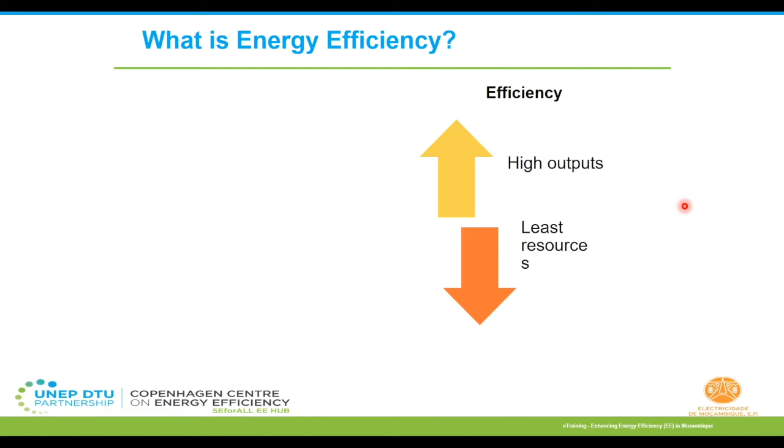Resources like time, money, raw materials, and in fact, your personal energy are required to achieve a level of output. These resources are quite limited, and everyone at every level constantly seeks ways to be more efficient. For example, a company would train their salesmen or deliver better product presentations to make sure that they have a better market penetration. Industrial plants may increase their product output by upgrading their technology and other process operations.

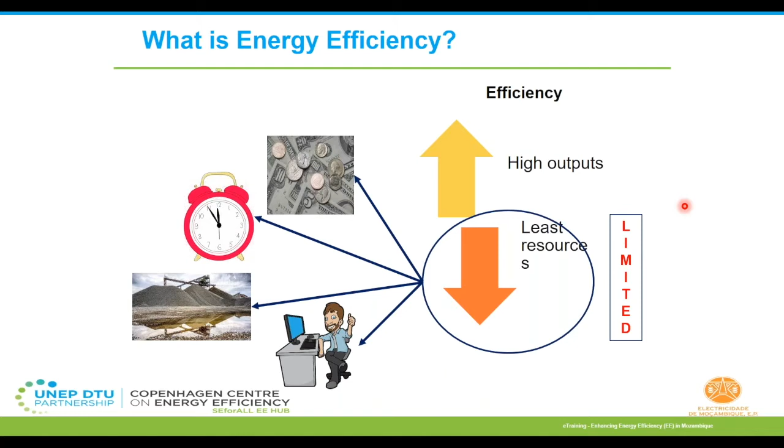So there are several representations defining the term energy efficiency. However, all refer to the same meaning. I am presenting here a broad definition used by the European Union Energy Efficiency Directive. It says energy efficiency means the ratio of output of performance, service, goods, or energy to input of energy. And it is usually represented in percentage values, 0% to 100%.

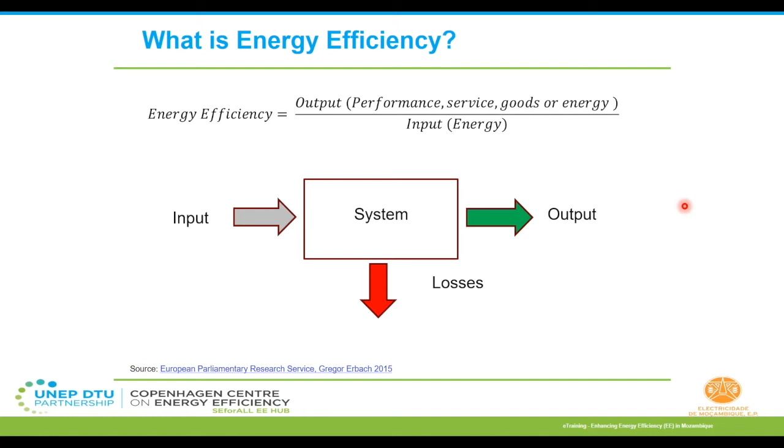To understand this better, consider a system. This system is something you define. You can consider your system to be a component such as an electric motor. It can be a boiler, it can be an entire building or a manufacturing industrial plant. There is input and then there is output. Usually the entire energy input is not completely utilized and there are losses that are bound to happen due to various reasons. We often talk about improving energy efficiency. So looking at the simple mathematical equation and the representation of a diagram here, we can easily infer how energy efficiency can be improved.

Option 1, you may adopt certain advanced technologies which consume less energy input for the same output that you are producing. Mostly energy labeling standards are based on this, wherein you find a higher rating for a given output. Let's say for air conditioning units, for a given cooling load output that it delivers, you have different energy labeling ratings because of different energy consumption patterns.

Option 2, you may adopt some operational changes to enhance your output production for the same input energy consumption. And then, of course, the most sought-after option is option 3, where we target at the first instance to minimize the losses in order to improve our efficiencies.

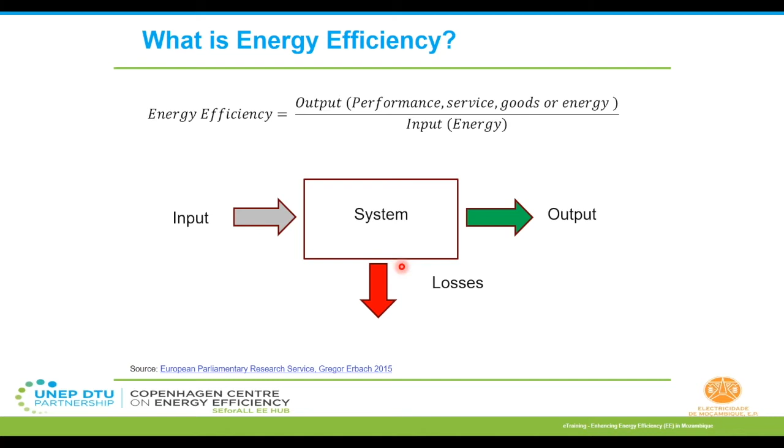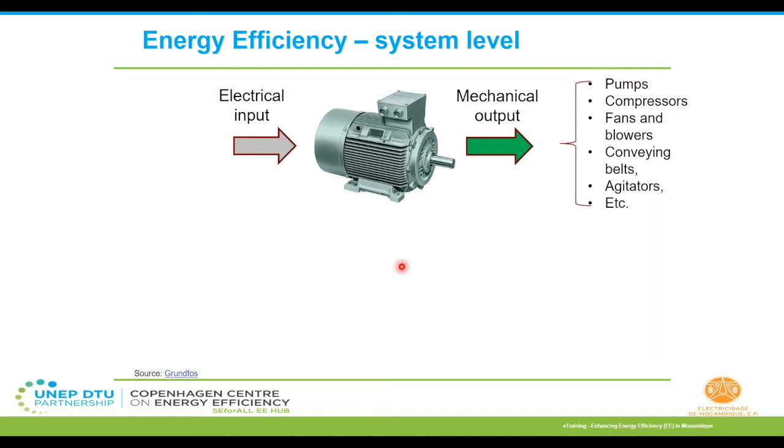Let's take an example of an electric motor. The input is electrical energy and the output is mechanical energy used for various applications. You must have seen on the design nameplates of motors the motor's design efficiency. For example, here a 5.5 kilowatt motor indicates an efficiency at full load of about 85.7%. That means for every 100 units of electrical energy that I use as an input, it gives me around 85.7 units of energy as a mechanical output. And of course, the remaining 14.3 units are generally lost in terms of various losses.

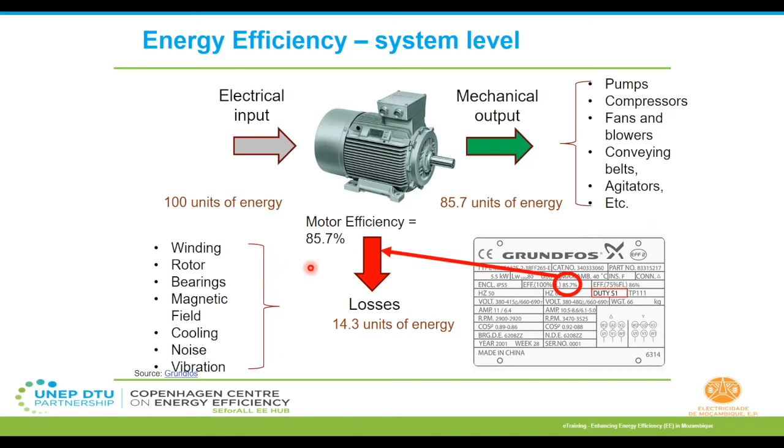Let's take another example of a boiler. The input is heat energy. It can be from coal, diesel, or gas. The output is also heat energy, which can be steam or hot water, later used for different applications. If you have come across any design details or performance reports mentioning that the boiler efficiency is say 90%, that means for every 100 kilocalories or every 100 units of energy that you use as an input, you get about 90 units of energy as an output, and the remaining 10 units are usually losses in different forms.

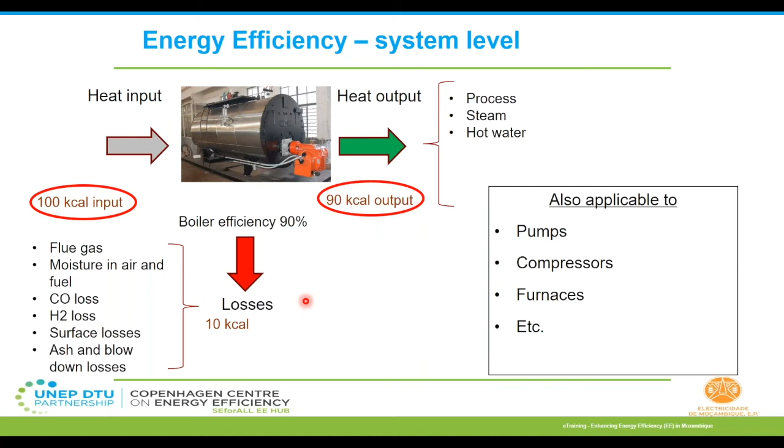This may vary. Something similar is applicable for pumps, compressors, furnaces, and other systems also, the same approach. Now, you have noticed here the units, generally they are the same units, often for several other scenarios. The representation of energy efficiency may not always be a unitless value, shown only in percentage. We will see some differences in the next slide.

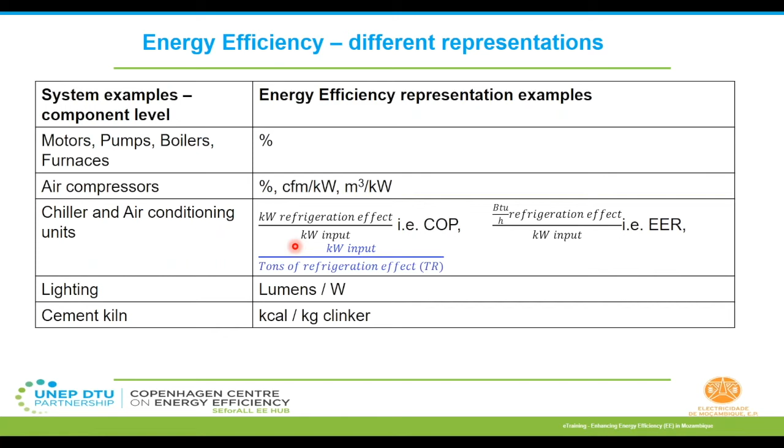Hope you are all still with me. Hope this is not confusing. I will show you more examples. Next slide.

As I mentioned in the last slide, for many manufacturing processes and other energy dependent activities, comparing input and output in the same units to derive a dimensionless number is not a practical approach. If you remember from the initial slides, the energy output can be energy, even goods, products, services. Please note that the ones presented here are actually inverse of efficiencies, for a practical approach, the standards we generally use in day-to-day presentations.

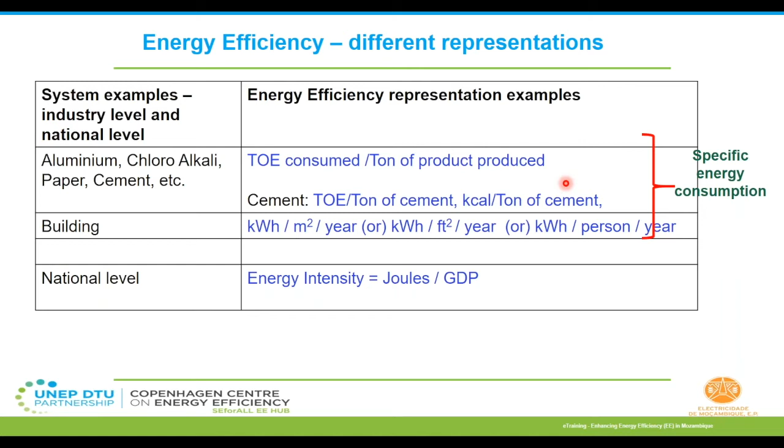Such indicators are often called specific energy consumptions and are widely used to compare energy efficiency across plants, across buildings, and even transport vehicles. On a national level, the term energy efficiency is not often used. We use what we call energy intensity. I think yesterday my colleague Gabriela also touched upon this part.

Unfortunately, in this process of increasing our energy consumption for the sake of development, we tend to forget about the negative impacts of this increased energy use. Negative impacts can be at global and local level, such as climate change, local environmental degradation, resource depletion such as water scarcity.

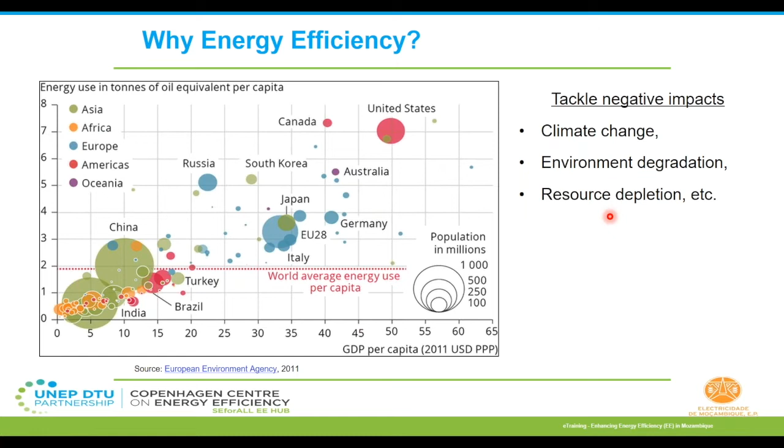At an individual industry, building, or service level, being efficient will help in reducing operating costs and enhance profitability. By being efficient, companies can gain competitive advantage over less efficient companies. That means increased profits, lower product or service prices, resulting in gain in market share. At a national level, the possible result would be reducing your energy imports. Imagine countries spending billions of dollars importing fuel and constantly under the pressure of foreign exchange. Energy efficiency would move them closer towards a more self-sustainable economy.

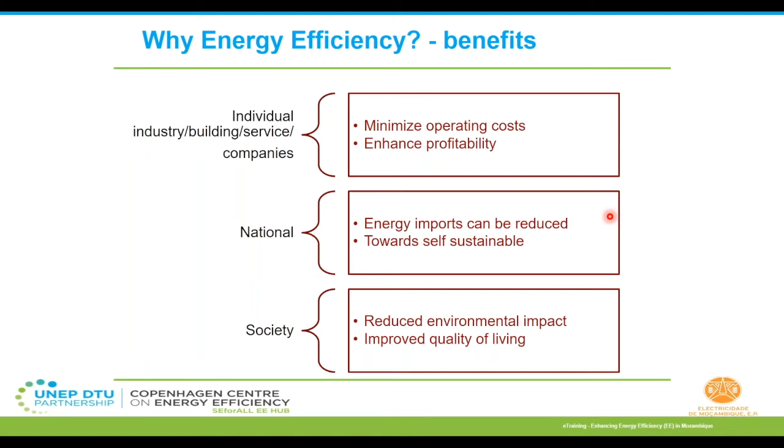At society level, it would improve the quality of living. Extensive fuel is being consumed in various uses, resulting in air pollution and other environmental impacts. In a way, energy efficiency would help mitigate all these problems. So these are some of the examples where countries and municipalities at different levels have incorporated energy efficiency measures into their mainstream policy and implementation areas, and they have phenomenally reaped the benefits in terms of energy savings and economic development.

Of course, this is one of the projects which I have also worked on personally. It's called the Perform Achieve Trade Mechanism in India, by the Bureau of Energy Efficiency and Ministry of Power. This is for the cycle of 2012 to 2015, where industries or other high energy consuming entities like buildings and hotels were given targets to achieve a certain level of efficiency. Within 2012 to 2015, they were able to save about 8.67 million tons of oil equivalent. Since this is mandatory, whoever is selected for compliance is supposed to reduce their energy consumption, and each is given targets.

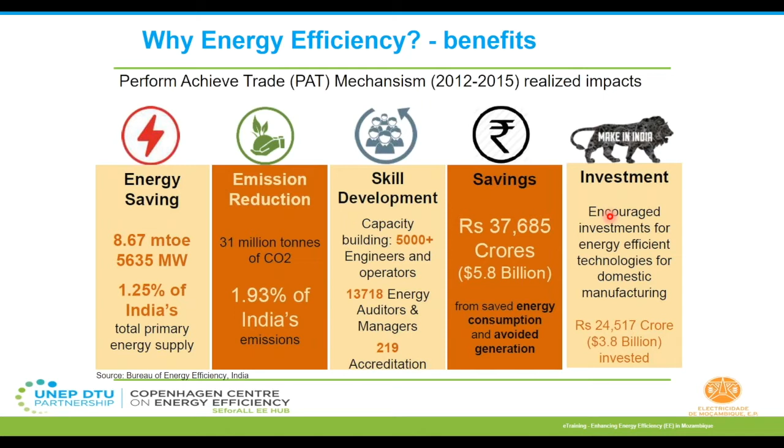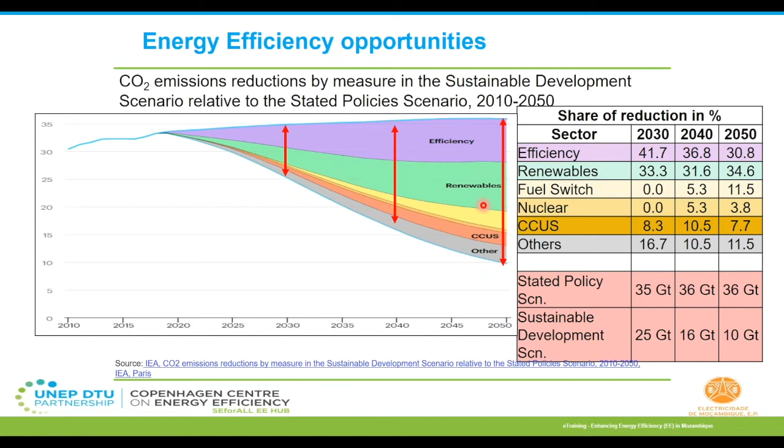Having seen that there will be opportunities for energy efficiency to play a vital role in sustainable development and limiting climate change, what are the other motivating aspects? Well, to start out, of about 192 countries who participated in the NDCs, 53 countries, that is about 27.6% of them, do intend to engage themselves in building energy efficiency as one of the aspects in achieving their targets. This is only building energy efficiency. If you consider energy efficiency as a whole, then you will have a lot more countries which actually set targets and aim to achieve them.

With new technologies constantly moving up into the market, they also set up new benchmarking levels. So yes, there'll always be scope for improvement with the help of energy efficiency. And at last, if businesses have to survive in the market, they have to take advantage of improving efficiencies and cutting down losses in various forms.

Energy efficiency integration with energy access. Well, often most of us, being privileged enough to avail a decent quality of life, continue to use and at times even abuse energy. When we talk about energy efficiency, the highlights are often how much energy we save, how much cost benefits a firm or an individual, and of course, in the process, how much the economy of the country is changing. What many forget is how our efforts in enhancing energy efficiency can literally bring light into the life of several energy starved regions.

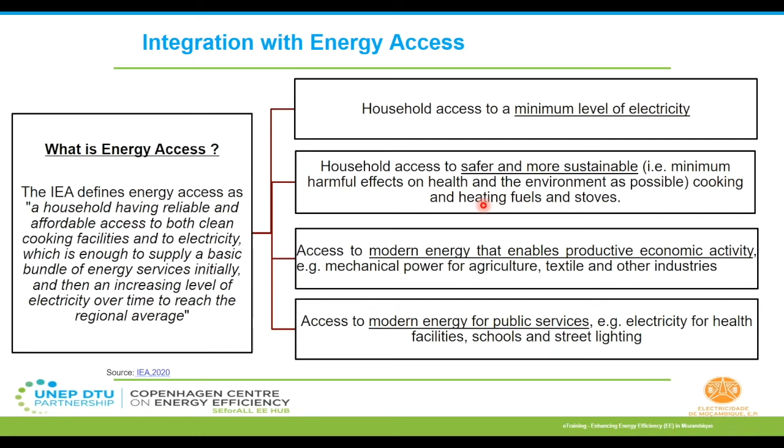The key points we need to focus on here are access to a minimum level of electricity, access to safer and more sustainable sources of energy, access to more modern energy which enables productive economic activity, and of course modern energy for public services.

We will quickly see how electricity reaches your homes, offices, and factories. Most of the participants, particularly from EDM, I believe, must be aware of this. This is for the benefit of those who are not aware of the details here. This and the following slide should give us a sense of how every unit of electricity that we save at the user end means a lot.

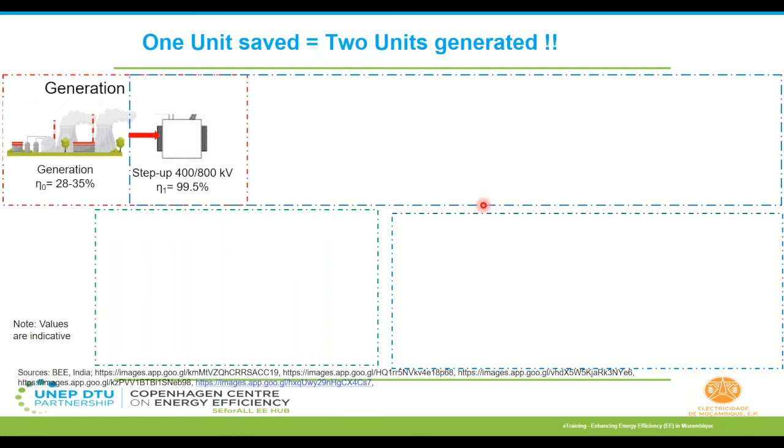So we have generation, that is thermal power plants. They are generally about 28 to 35% efficient, depending on the size, the age, the capacity utilization, and the type also. So when the electricity is generated from the power plant, it is sent to step up. The voltage is stepped up so that it complies with the requirements of the EHV transmission and substation lines, the extra high voltage lines.

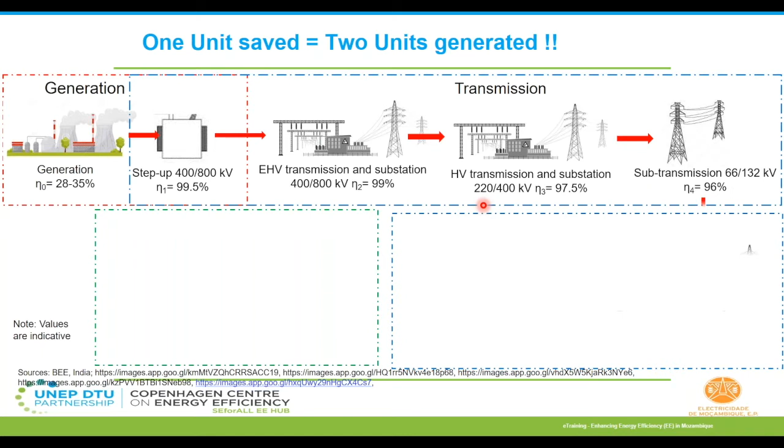And then from there, the electricity journey travels through high voltage transmission and substation lines, further transmitting and finally entering into the distribution network, where it is stepped down. The voltage is stepped down to cater to the needs of the end user requirements.

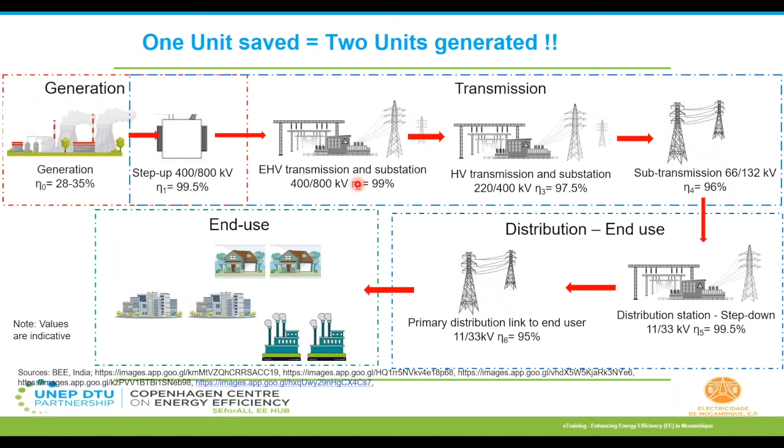So if you see, each section or each system individually has their own efficiency values. That means there are certain losses that are bound to happen during transmission and distribution networks. Please remember that the values are indicative. Depending on the type of utility or depending on the countries and the infrastructure, the values can vary.

So to be brief here, you have a generation system, where electricity is generated and pumped in at point A, and you have the entire transmission and distribution network, where usually the losses are somewhere around 17 to 50%. That means 50 to 83% efficient. And then the electricity finally, for example, here I'm taking an industrial plant context, enters into the plant's distribution network. It's again about 95% efficient.

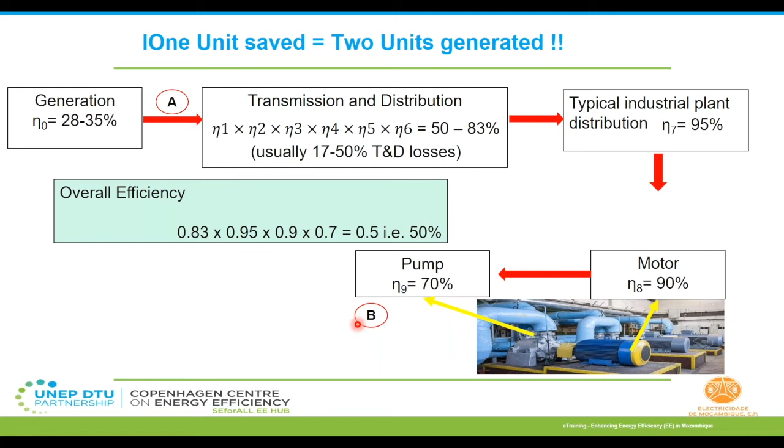And I'm calling an end user here to be a pump and a motor. So the electricity is fed into the motor, which is about 90% efficient, and then finally used for a pump with a 70% efficiency at point B, where you actually use the energy that is being supplied. So overall efficiency from point A to point B, it's called a cascading effect. If you multiply all these things cumulatively, the overall efficiency is about 50% only.

That means for every 100 units that I supply into the grid, finally I will be able to use only 50 units worth of energy that is being pumped. So that means if I save 1 unit here, it would be equivalent of generating 2 units here. So now I think it should be clear the impact that one would be creating sitting at home or office or even at an industrial plant. If you save 1 unit, how many units you are actually saving, and what is the larger impact it would have?

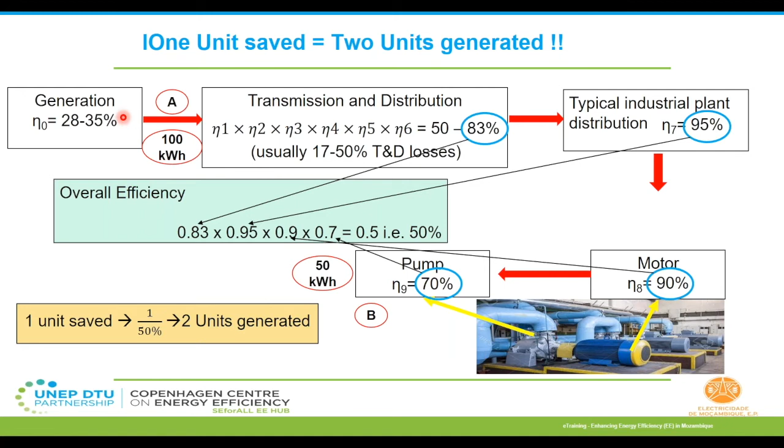Positive impact. So what are the benefits of energy efficiency in energy access? Well, if throughout the entire system, the T&D system, the user distribution system, as well as the end-use areas, you are efficient, you would avoid unwanted investments for new power plants because there is reduced demand, and due to reduced demand, the pressure on transmission and distribution lines is also reduced. And the energy that is saved in one location can thus be utilized for other energy deprived locations.

I will move on to the next topic, the energy efficiency integration with renewable energy. So we all know, but a quick introduction on renewable energy. It is also referred to as clean energy, usually a natural source or process that constantly gets replenished. We tap into this natural form of energy through different means. You can use solar PV panels, where you tap into the sun's energy to generate electricity. Then you are aware of solar thermal, wind, biomass, hydro, and geothermal.

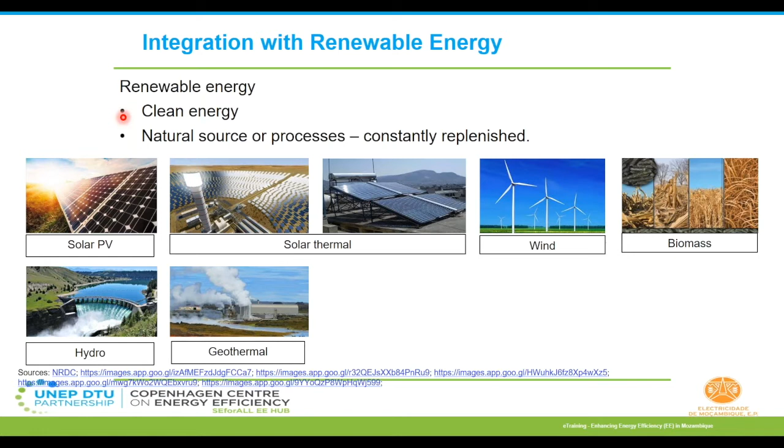So there was one question which was given in the polls, whether energy efficiency and renewable energy, according to you, are the same or different, and around 60% said same. Let me make some things clear here. Renewable energy is not exactly energy efficiency. However, they may support each other. So if you see energy efficiency, it's basically utilizing the existing energy, irrespective of whether it is renewable or not renewable.

So mostly about how much work you do in less energy with no loss in quality. Renewable energy, on the other hand, is a source of energy which is inexhaustible. So let's say, for example, I am using an incandescent bulb. I will be replacing it with an LED or a CFL, an efficient bulb. That is what an energy efficiency measure is about.

Whereas with renewable energy, it doesn't matter what you are using, an incandescent or efficient bulb. It will be supplied for both of them. So there is a slight difference here, but we will see how they support each other. So here, if you see, renewable energy supports energy efficiency.

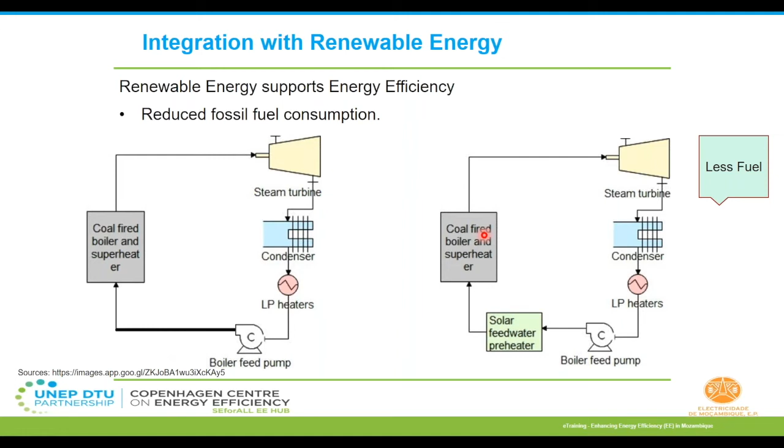For example, if the water is already preheated for the boiler here in a power plant, then you will have less fuel requirements to heat up the water to desired levels by the boiler. Similar applications can be used for hotels, kitchens, process industries.

We must have all seen buildings having solar water heaters on the rooftop. This is a way to avoid using electricity or gas heaters, a way of improving the building's energy performance index, that is kilowatt hour per year per meter square, because you will be relying less on external energy, that is gas or electricity.

I have personally seen many hotels and large kitchens segregating cooking needs and using steam generated from solar thermal, thereby saving large energy costs on cooking gas and electricity. So yes, if you integrate renewable energy and energy efficiency, the way renewable energy supports is through reduction in your fossil fuel consumption. Your costs come down, and your environment is much cleaner.

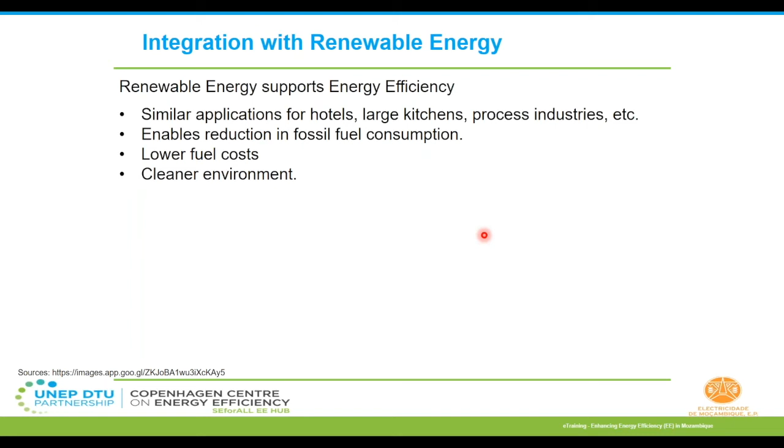Then this is another example where energy efficiency supports renewable energy. This is one of the projects I worked on earlier for a sector of college and school buildings. There is a college building which used to consume about 6,590 units of annual electricity. When it was only grid, let's say it's about 100%, then we installed a solar rooftop PV of

Then further, an energy audit was done, and recommended energy saving measures were implemented, mostly in the lighting, the kitchen cooking needs, and the computers, where the old CRT monitors were converted into new LED models. That way they were able to save about 5,000 units on an annual basis. Those additional units are further pumped back into the grid because they are not required, since the solar is already connected to the grid.

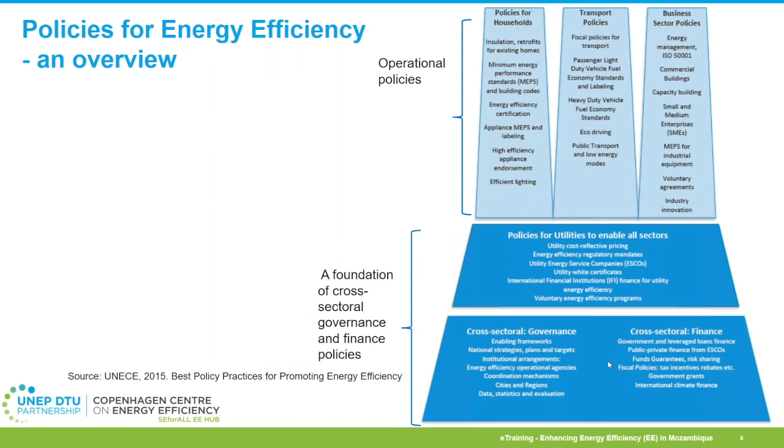And also the issue of finance, which covers all energy efficiency actions: how to make finance and funding available so that enterprises, households and public sectors take up energy efficiency in their investment, purchases and operations.

First, for households, especially homes, residential buildings and appliances. For homes, there's a lot of opportunity for insulation. There are many technologies available today, better, more effective windows, doors, insulation, to make homes more energy efficient so that you do not need so much energy for heating and cooling.

And things like shading, planting trees, how you do the roof, and also the direction of the houses, in the planning stage you can do a lot. And also minimum energy performance standards: in many countries there are energy efficiency standards, MEPS, especially for new buildings, or building codes, and also certification.

Like in Denmark, if you sell your home, you need to do an energy audit to show the energy efficiency level of your house before you can put it on the market. And also for household appliances, standards and labeling show the energy efficiency of refrigerators, washing machines, all the different household appliances.

Consumers and buyers can buy more energy efficient products. There's endorsement, like the Energy Star system, which endorses the most efficient appliances on the market, so if you buy appliances with the Energy Star label, you make sure you have the most energy efficient ones, and you also save money from that.

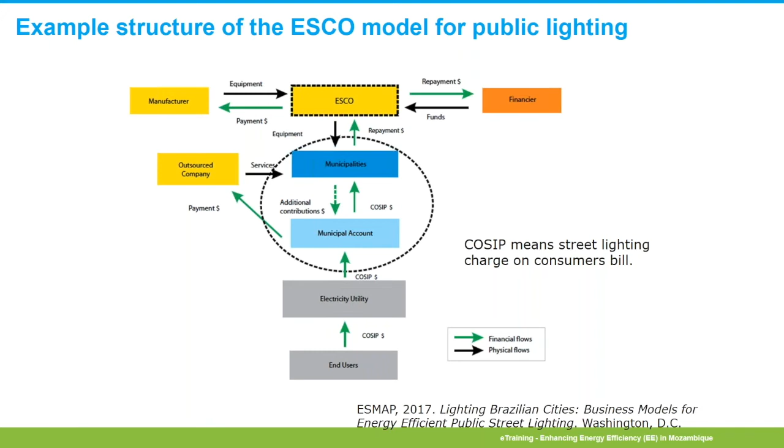Also for the ESCO model, utilities work as ESCOs. They purchase the equipment and get loans to help municipal governments do efficient lighting, changing the street lighting. In that way they get the electricity saving, get the repayment, and also manage the electricity demand.

One way for energy efficiency is governance: how to make sure the overall policy framework is supportive for energy efficiency, with clear roles and responsibilities for energy efficiency policy making. For energy efficiency you not only need the energy ministry, but also many other ministries, the Ministry of Industry, Ministry of Buildings, and many other government agencies in a supportive role, with clear roles and responsibilities and coordination. And also national strategies, plans, and targets, so that the policies are consistent over time and integrated in different government policies, and also give consumers and enterprises a clear long-term signal so that they can make long-term investments based on the government policy.

Also, operational agencies. For energy efficiency, there's a lot of things to do: standards, different supportive schemes, guidance, a lot of data collection. So how to make sure these policies work together. At the local level, you may need each different level of government to have some agency in charge of energy efficiency doing the coordination. This coordination is very important for energy efficiency, to make sure all different government agencies, businesses, and the public work in the same direction.